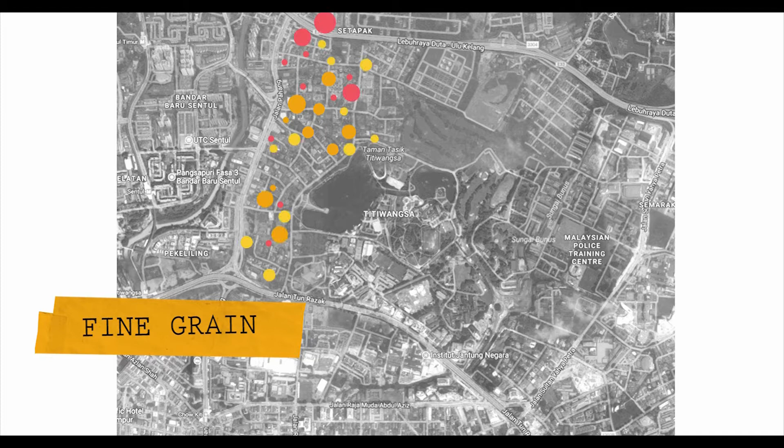The deformed grid pattern shows that fine grains are concentrated around the northwest district, which are mostly residential. Due to the smaller building footprints, more intimate negative spaces are formed, promoting permeability and walkability.

Coarse grains are fringed around the southern part of the lake, where larger institutional buildings are situated. The large building footprints have a much higher hierarchy due to its low permeability. They serve urban purposes but not necessarily the public, as they cater to only certain targeted groups of users.

Unfortunately, the lake becomes a coarse grain due to the lack of a gradient buffer zone to soften the contrast between the two. The water body diverts human flow away due to its low porosity and monotonous programs. This shows that unsynchronized planning between the park and the surrounding fabric only leads to a messy collage that disconnects from its intended user.

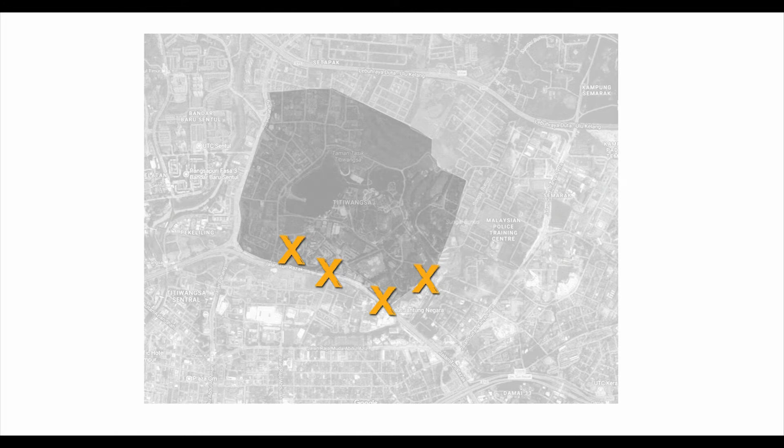Mainly surrounded by commercial or institutional buildings, art and academy-oriented establishments such as the Istana Budaya, Balai Seni Lukis, National Library, Wisma Bernama, all embody a strong locally symbolized identity.

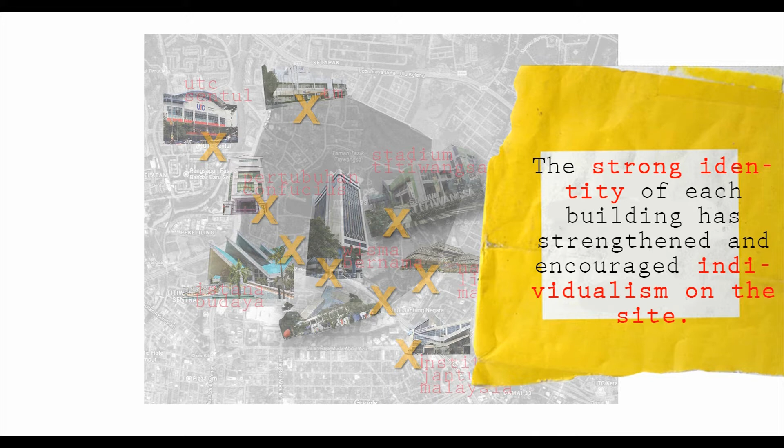Some civic institutional buildings such as UTC, Institute Jantung Malaysia, TM and Stadium Titiwangsa serve their prominent function of serving the community. However, the strong identity of each building has strengthened and encouraged individualism on the site, instead of showing any interest in unity.

The highway serves as a distinct physical buffer between the busy road and the quiet residential area.

Conversely, the lake itself is a disjunction, a natural border in a sense caused by its unhumanized scale, which cuts off the physical connection between the banks and diverts people away from it.

Accessibility edge is posed by the police training ground, inaccessible by the public. Property fencing edges are framed at the vicinity of UKM and the National Library. Both buildings can see each other's presence but never truly connect or interact with the surrounding, as the fences shut off entries and demarcate an edge as acting against one another.

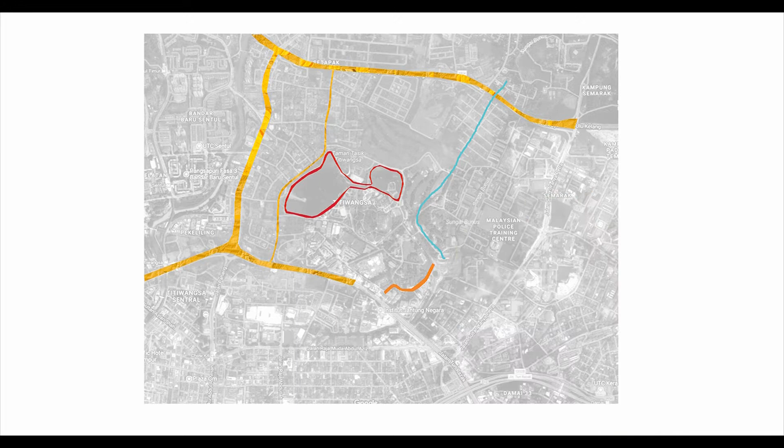Covered from public view, the unattended backside of the institution forms dormant spaces which are drained and vacant. The borders form a loop within a loop, a jumbled connectivity.

Nodes can be found around, either physically or from points of interest such as the Satay Station, playgrounds, plaza, Jalan Fletcher bus stop, Istana Budaya. However, they exist as minor point forms instead of linear and vertical. Without much variation, the influential effect of these points is diminished as well.

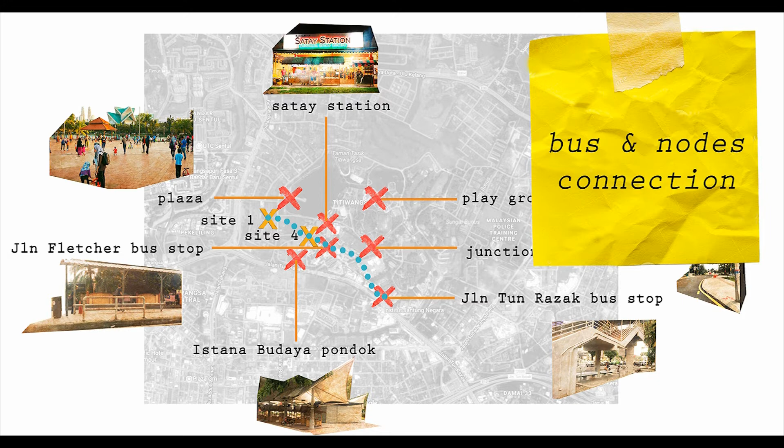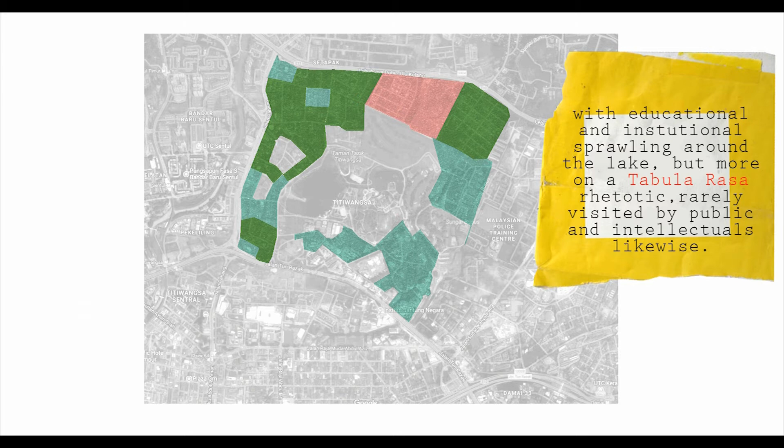Seemingly of poor planning, industrial zones are flanked by residential buildings. Despite having educational and institutional structures sprawling around the lake, the location itself is hardly visited by the public and intellectuals.

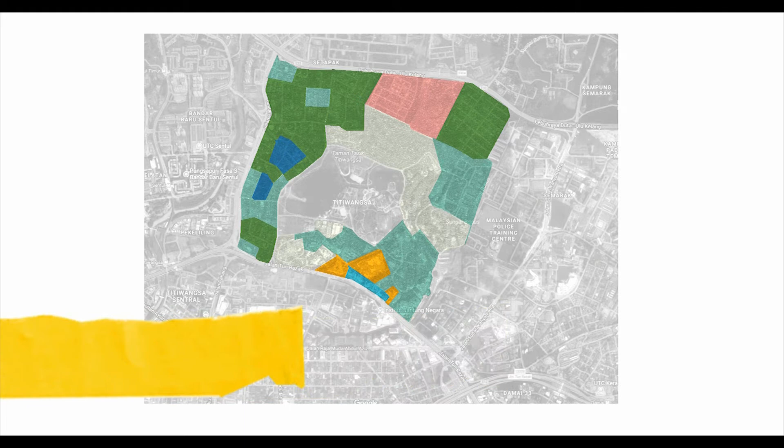With some minority of religious, commercial, and healthcare buildings sandwiched in between, Titiwangsa Park is left to serve a recreational purpose within the ring.

Various areas show no connectivity. Scattered landmarks with distinct identity promote individualism. Mishmash district planning raises connectivity issues, and most nodes are temporal, contributing to a state of tabula rasa.

Scattered trees are either not tall enough to give a sense of shelter to humans, or not dense enough to create shades. Sparsely apart, it allows heat and sunlight to pass through. Little to no shading is provided along the pathways where most activities take place.

The lake is mundanely flat, lacking human interaction to bring life, texture, and interest to the plane. The architecture around the area is nationalist in appearance, resulting in big, unfriendly complexes only appealing to certain groups and not the new generation. Once the scale of intimacy within a space is lost, the sense of belonging can hardly be retained.

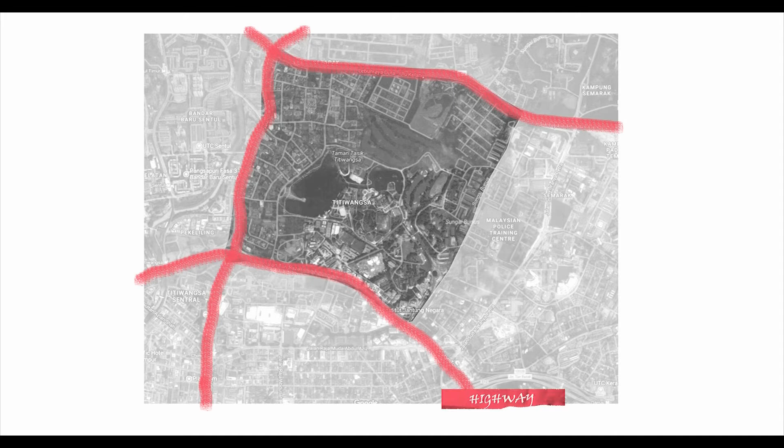Primary vehicular lanes frame both the south and west border of the park. Secondary paths branch out to reach the east and north. Although the circulation is a complete loop, it is unable to attain users due to its lack of diversity to attract people, even though car parks are located around the loop. The four limited entrances reduce the porosity of the park for spontaneous activities.

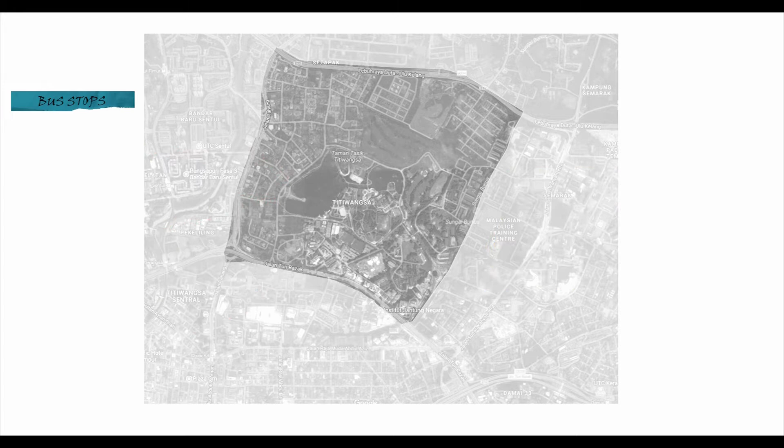Travelers, especially foreigners who take public transportation such as the LRT, have to walk 20 minutes from the nearest station. Even though bus stops are nearer to the site, considering the downside of irregular and late timing, the public transport access is still not optimal.

Various activities take place around the park, but only a few within the park, such as jogging, cycling, and occasionally fishing. The patchwork dissipates the human flow, confining the scope of activities to merely recreational purposes, causing the site to be active only in the early mornings and evenings with joggers and cyclists.

The park is only exposed to light breeze, much affected by the flat, low-lying terrain, thus the park is hot and humid. Due to the bare land with minimal shading, the microclimate is hot and scorching, especially during midday.

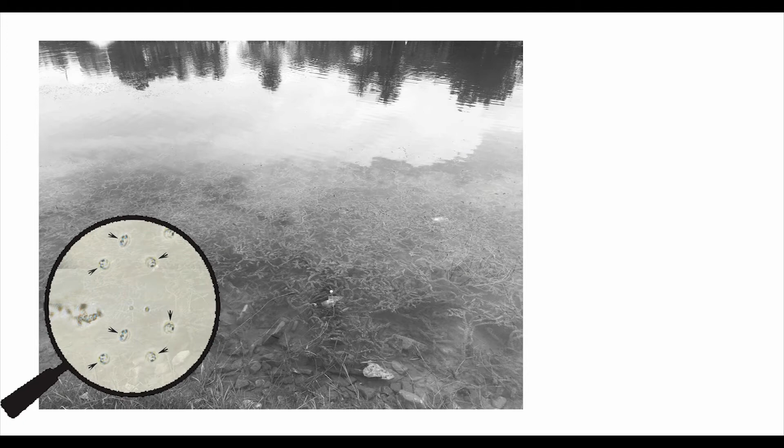According to a pathogenic test, the water from Lake Titiwangsa is contaminated with waterborne parasites from the urine of animals. All water activities are halted, and the advantage of having a large water body is wasted. Should we not get rid of the parasites and make this site a vibrant community water sports recreational destination as it was before?

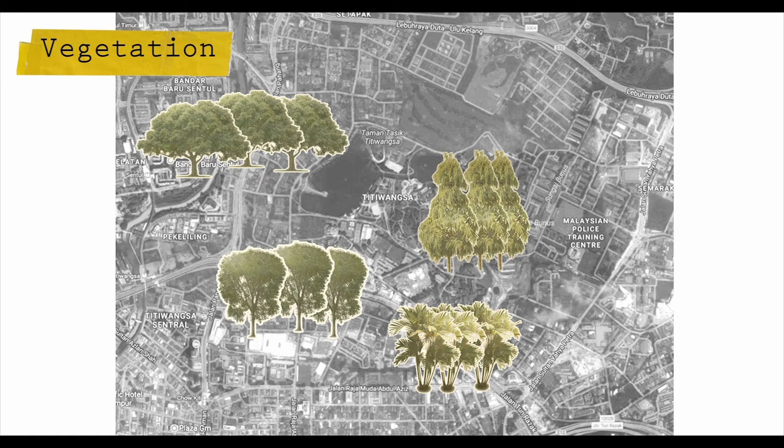Although known as a green space, the tree species are monotonously bare, limited to only a few varieties of tropical palms and hardwoods, showing a sense of dull uniformity. This mixture contradicts its vision of a vibrant green space, stemming from the very root of nurturing and harnessing nature itself. If so, how can the beauty of nature be expressed or even enjoyed?

Site 1 proposes a visitor interpretative center, holding a richer vegetation that provides shading. The trees filter ample sunlight as a natural breeze alley, simply delightful. It overlooks the pond, providing a soothing scenery with reflections of the surrounding when the fountains are on.

Situated at the corner of the park, framed by two intersecting roads from the west and south, are jogger tracks at the east, addressing an optimal circulation. Recreational facilities and furniture are well provided, encouraging people to chat, jog, cycle, and dine here.

To the north, views are disrupted by the odd location of restrooms, which only one out of three is functional. Thus, a visitor interpretative center which allows users, locals, and foreigners alike to enjoy the beauty of nature is appropriate for this location, although it may not be in its fullest beauty now, but through architecture it can be heightened.

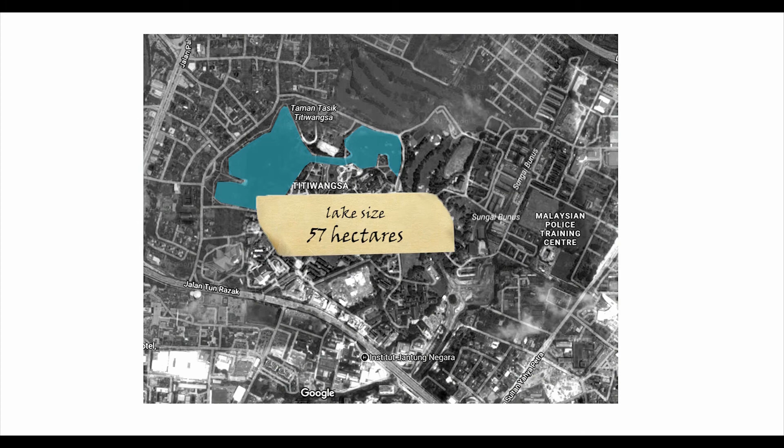Built in the 1980s with a total coverage of 95 hectares and a 57 hectare lake, Titiwangsa Park is one of the largest parks in size in Malaysia. With a strategic location within the heart of KL, it offers activities such as jogging, cycling, horse riding, golfing and badminton, as well as playgrounds and radio-controlled car racing. However, most of the facilities are in a dismayed state, with no local accent and no linkage with cultural activities.

While the KLCC Park, built in 1998, is relatively smaller, it is much livelier than our site. It holds a clear objective in cultivating a heritage of tropical greenery, preserving transplanted indigenous planting from the former Selangor Turf Club. Fringed by iconic destinations such as Suria KLCC, Masjid Asy-Syakirin, and the KLCC Aquarium, it successfully attracts visitors from these sites to stop by.

It is a good intervention in the midst of the hustling and bustling commercial heart of KL, with a touch of greenery that attracts locals and tourists. Daily, there are light and music shows at noon and evening to keep the place pulsating. Although the scale is small, it successfully brings the local identity of Malaysia by preserving its indigenous plants and biodiversity.

In Dubai, Safa Park is a large oasis, holding various events such as bazaars and carnivals. It receives vehicular and human traffic from all sides, including 55th Street, Al Wasl Road, Zayed Road and Al Hadiqa Street, to offer a complete escape from the hustle of metropolitan Dubai. Although it is located 10.57 kilometers southwest from the center of Dubai, visitors, locals and foreigners alike will still come over by means of metro.

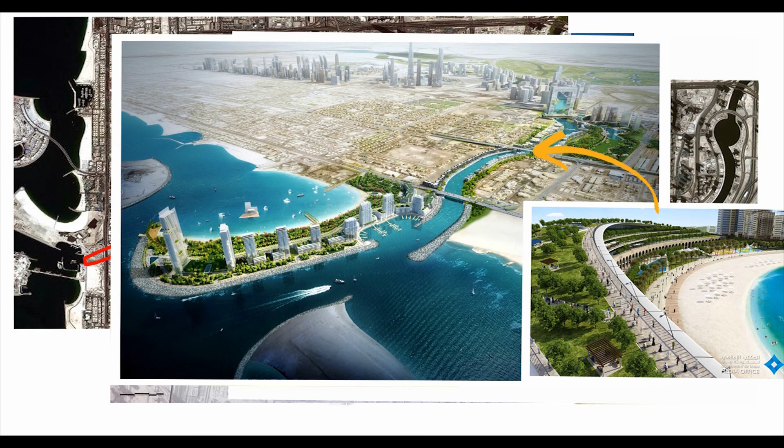Rich in diversity, well master planning and various programs are the key to its success.

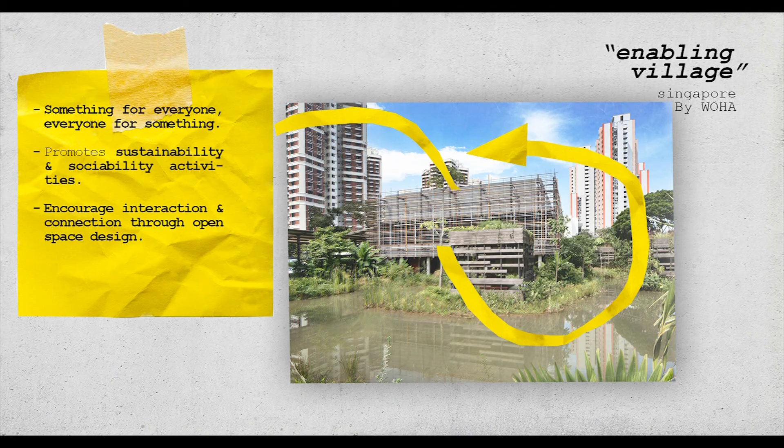Enabling Village in Singapore by WOHA places people at the center of the design, which we think is valuable. It integrates 4 main points: environmental values, interweaving spaces, intimate scale, and reminiscence. Water bodies help regulate the microclimate of the site to create a serene environment. It integrates inside and out to bring nature closer to human. Using wooden louvers, it blurs the boundary between them, showing an architecture that reacts actively to the surroundings to bring a sense of belonging to the particular site.

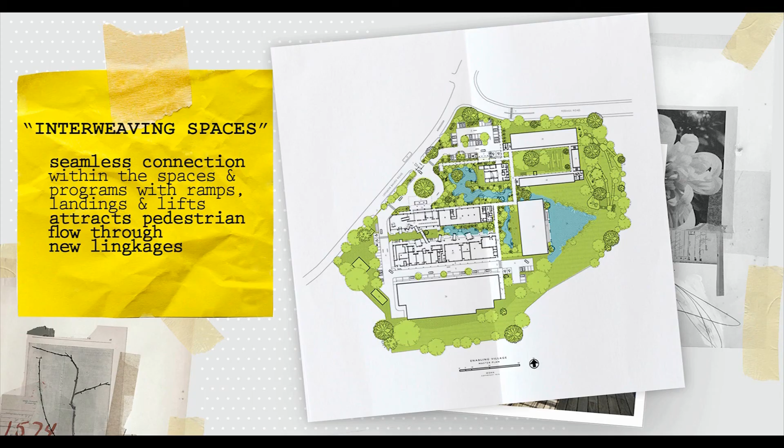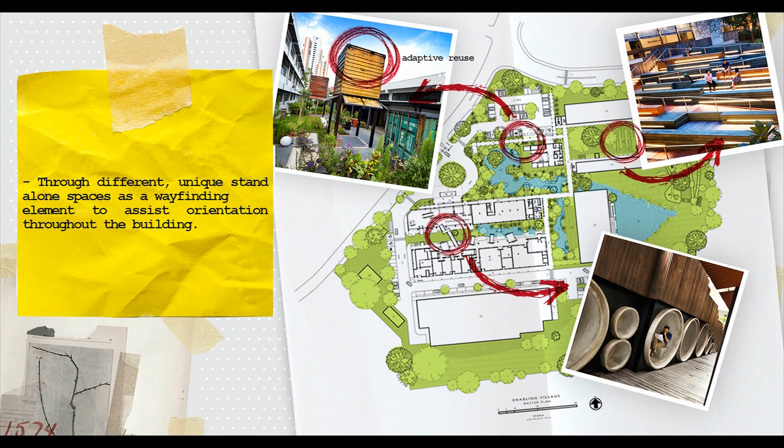Interweaving spaces are achieved by using various linkages and composing a seamless connection, an important element much needed in our disconnected site. These variations give different experiences for the users while giving a clear sense of orientation and navigation. Intimate scale is achieved by humanizing the scale between building and human, which is essential to our site, lacking a balanced proportion between man and landscape.

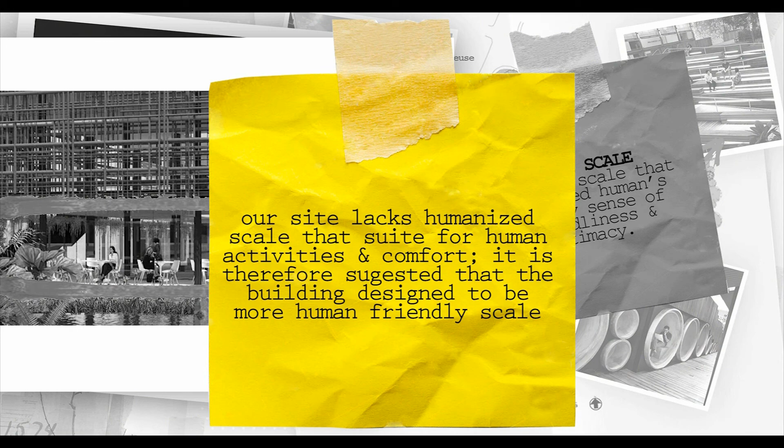The Arc by Rimayu Architects puts the community first in the design stage. Through participatory design, it promotes integration between residents to revitalize the park. It includes various types of functions to serve and attract diverse user groups.

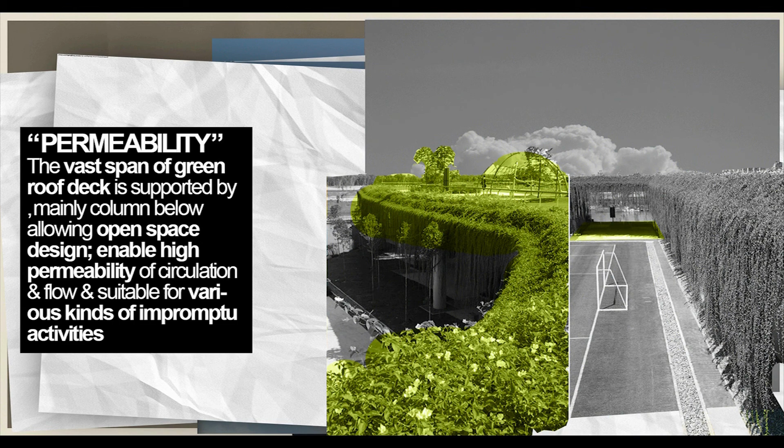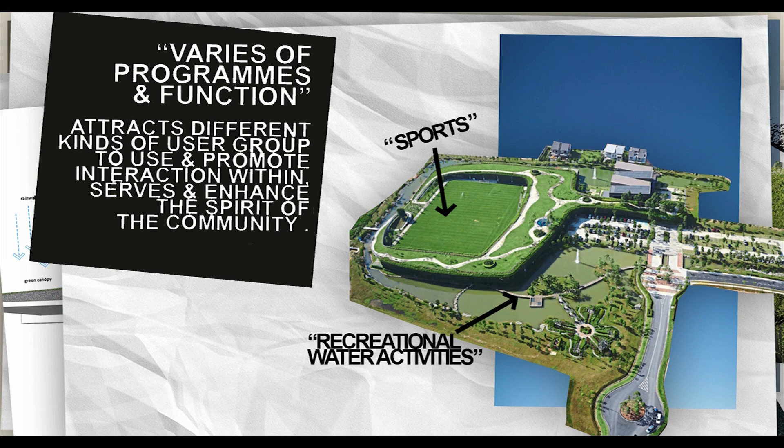Permeability is achieved by lifting up and spacing out the ground floor entirely for open activities, allowing a free plan for users to interact and carry on spontaneous activities. It offers various activities to the space, not restricting its function only to a sports center, but also including sedentary activities to cater to different users in order to sustain its activeness.

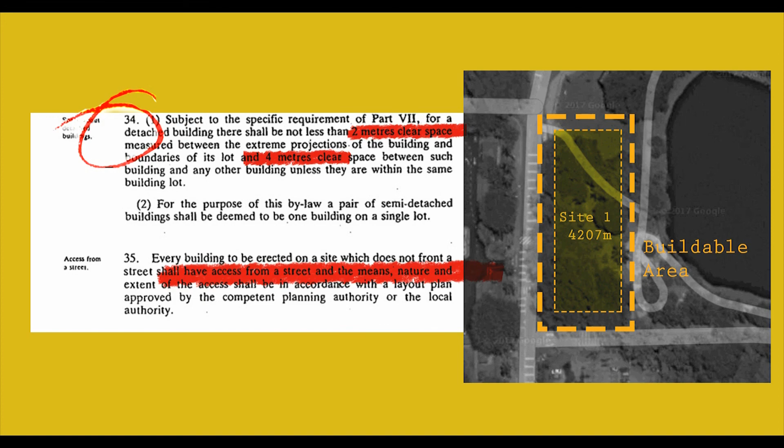According to the Uniform Building Bylaws, as a detached building on the open field of Site 1, the proposed architecture must have at least 2 meters of clearance from the lot boundary. For Site 4, a minimum 4 meters clearance from surrounding buildings should be addressed.

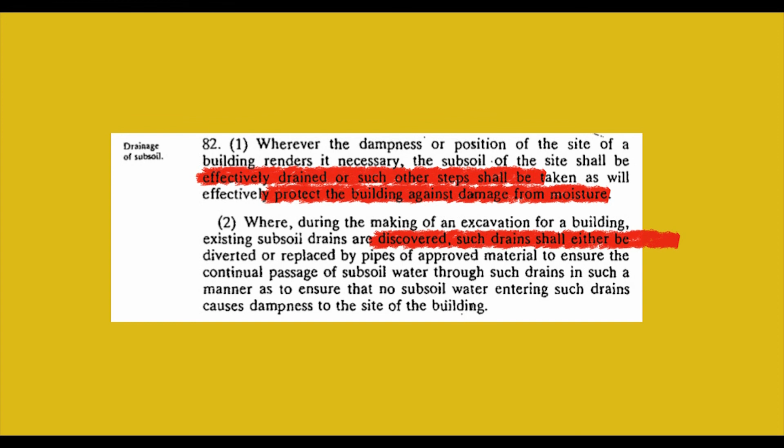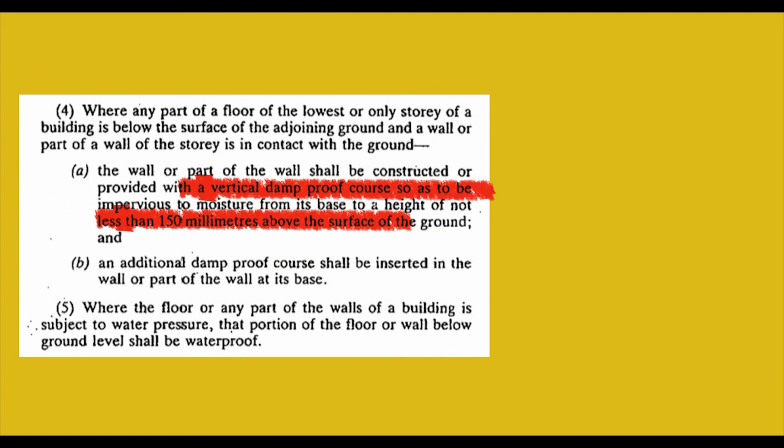Due to the proximity to the water body, subsoil of Site 1 should be effectively drained. In excavation, if drains are discovered, they should be diverted or replaced. To prevent dampness, damp-proof membrane should comply with BS 743 standards. If the wall is in contact with the ground, it should be protected with damp-proof membrane at the base. Floorings or any elements subjected to water pressure should be waterproof.

In the present state of tabula rasa, the architectural intervention should act as a catalyst to reignite the distinct taste of the place, addressing the needs of the community who calls this place home.